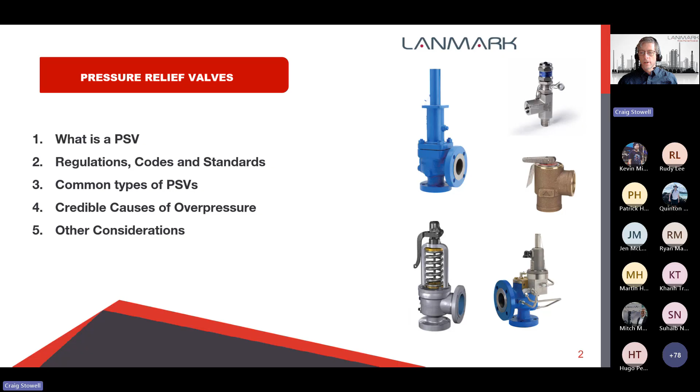So moving right along, what is a pressure safety valve? I'm sure if you're here, you might know already, but essentially it is to protect life and property by venting process fluid from overpressuring a vessel, equipment, or piping system. It's often the last line of protection in a system when all our alarms and shutdowns may have failed. The PSV might be our last line of protection from sometimes blowing stuff up. So they're very important.

So what we're covering today are PSVs that are set at 15 PSI or higher. They open at a set pressure and reclose when the system pressure drops below the set pressure. What we're not covering today are rupture discs, tank relief, safety valves, and vacuum protection.

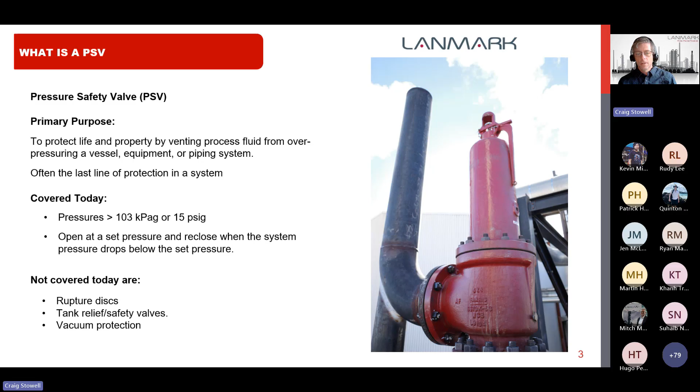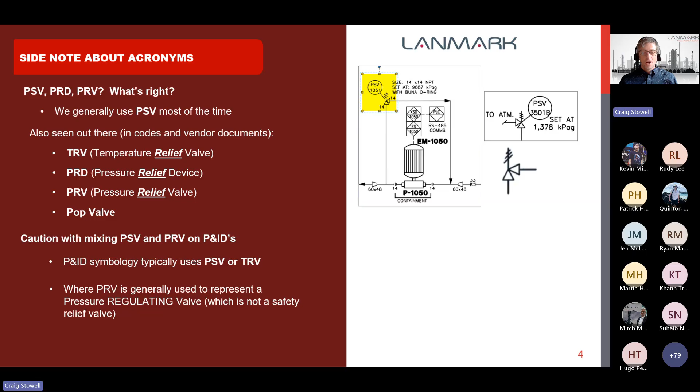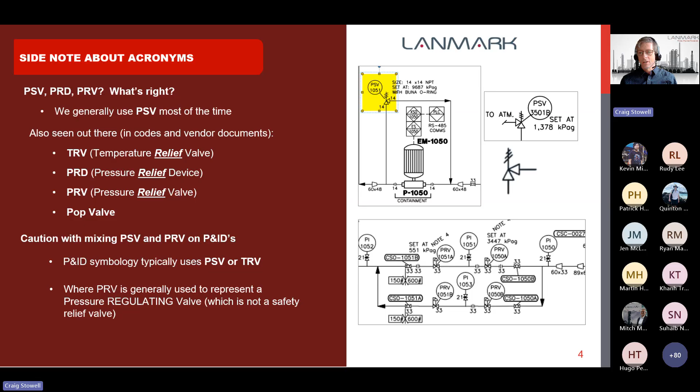I like to talk about a little side note about acronyms, because there's a lot of acronyms for a PSV. You might see PRD, PRV, which one is right? I'd say generally for Lanmark and most of our clients, PSV is used most of the time. But we also see temperature relief valves, TRV, pressure relief device, PRD, and pressure relief valve or pop valves. So caution with PRV and mixing PSV and PRVs on P&IDs. Forgive all the acronyms here, but typically we use PSV or TRV, where a PRV is a pressure regulating valve, which is generally used to drop pressure in a system. You can see the diagram on the right here where we're dropping through regulators. So sometimes you got to keep your acronyms correct. So we are talking about PSVs, and I'll refer to them as such throughout this presentation.

Some of the design standards that are really important when we're considering PSVs are API 520. This has equations and sizing for liquid, vapor, and multi-phase fluids. It also has many considerations for the installation of PSVs, talks about inlet and outlet pressure losses from your PSV. So really important, we go to this a lot.

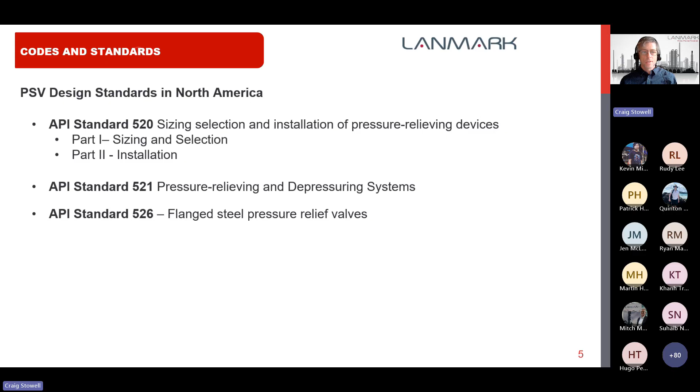API standard 521 aids in the selection and helps guide your decision to discover overpressure scenarios, and helps you not only prompt for all the overpressure scenarios we might encounter, but has equations and guidelines to help determine relieving rates. API 526 is more like the dimensional guidelines for construction of valves, and also defines API orifice areas.

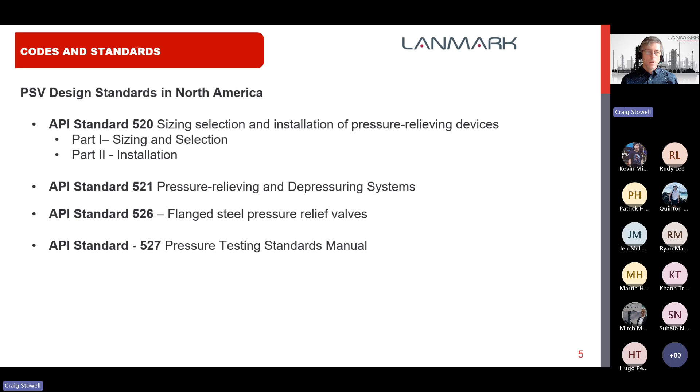527 covers pressure testing standards for all the conventional bellows and pilot operated valves. And if we're dealing with any vessels in the system or boilers, then ASME Section 1 or 8 might come into play.

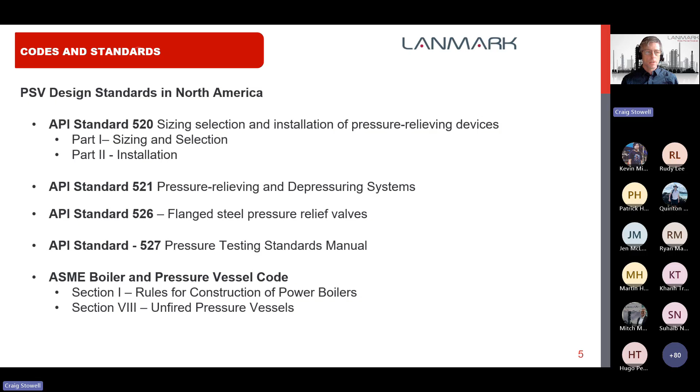We also might have local rules and regulations that we have to consider, both national and provincial. In Alberta, we might deal with CSA, B51 or Z662, AER directives, and ABSA regulations.

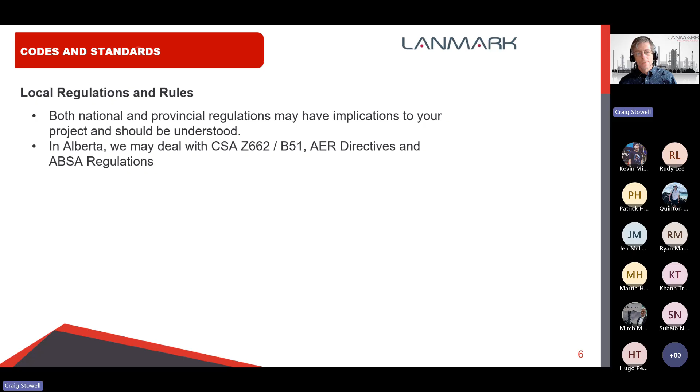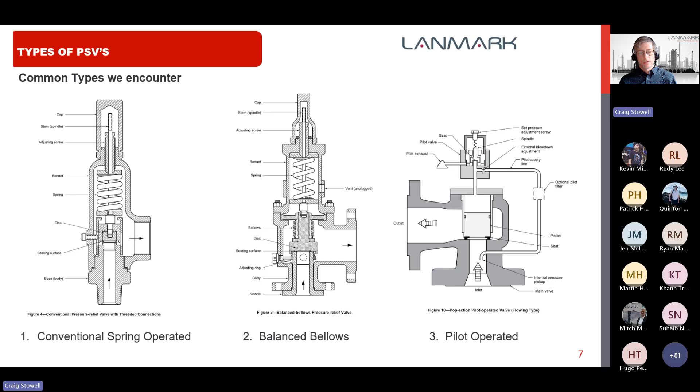So what are the common types we encounter? We encounter conventional spring-operated PSVs, balanced bellows, and pilot-operated. I'll get into the details of each of these as we go. So those are generally the most common that we deal with.

Conventional spring-operated basically have a spring that's set at a set pressure, and when the process pressure exceeds the set pressure, the disc opens and lets fluid out, and it resets once the process pressure drops below the set pressure.

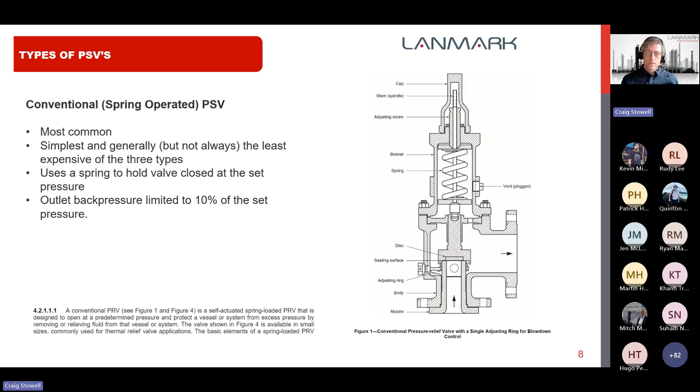One of the limitations of a conventional PSV is on the outlet side, you're limited to 10% of the set pressure. So sometimes that can be a problem in existing systems where you have constraints already, or other things that we'll get into. Balanced bellows are very similar to the spring operated, but it has a bellows to minimize the effect of back pressure.

Generally you can live with about a 30% back pressure on a balanced bellows, sometimes more, depends on the vendor.

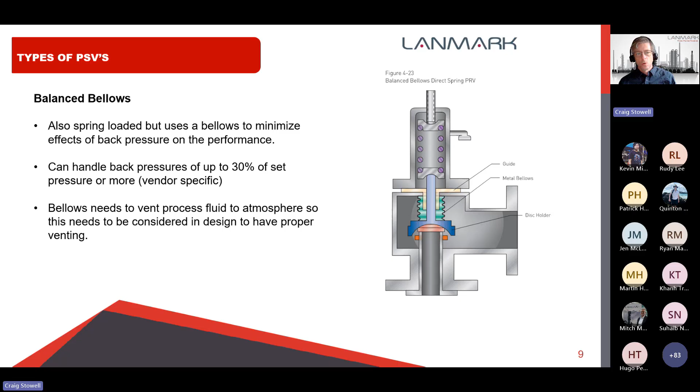And the one thing to note with the bellows is you have to vent process fluid out of the bellows. So if it's toxic, like it's got H2S or something like that, it's something to be considered where that's going to go. If it has to go into a flare system, or maybe it's ammonia that has to be vented outside a building away from people. So it's one of the kind of quirks of the balanced bellows you have to keep in mind.

Pilot operated PSVs don't have a spring, they use a pilot system. Generally, as the operating pressure gets closer to the set pressure, you get a better seal. The balanced bellows and the spring operated have issues when you get too close to the set pressure. And you can also have very high back pressures in a pilot operated PSV, as high as 98% in some manufacturers' PSVs.

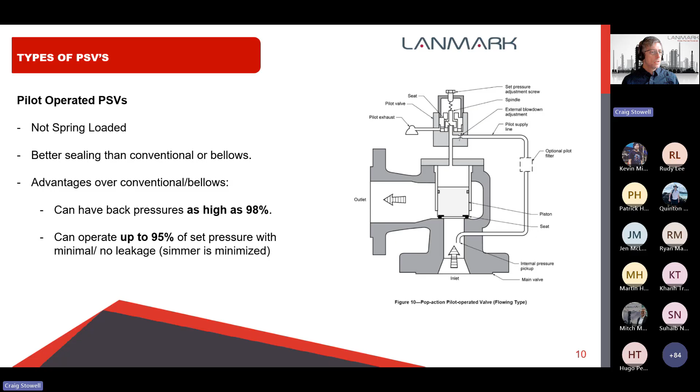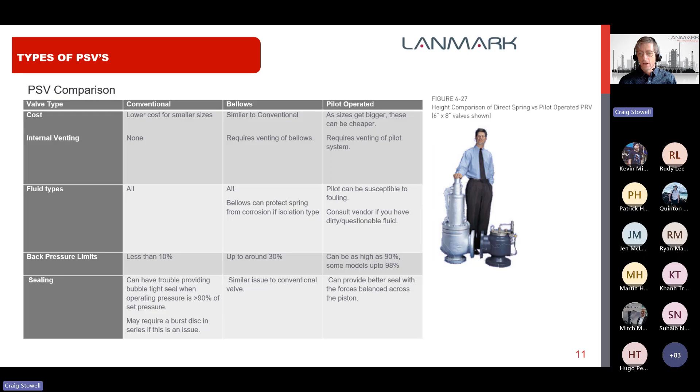The pilot can be susceptible to fouling or freezing, so that's something to consider too. If it's a really dirty fluid, you might have to have filters on your pilot system. So those are the three types of PSVs we generally deal with the most.

Specifying the fluid is important when you're ordering a PSV, because vapor, due to its expansive energy, can generally use a flatter trim, where a liquid trim needs to have some modified geometry to help it open. And generally a liquid trim can be used in vapor, but not vice versa. So keep that in mind. Ideally you get the trim suited for your liquid, but sometimes you're dealing with existing equipment, and sometimes you have previous constraints.

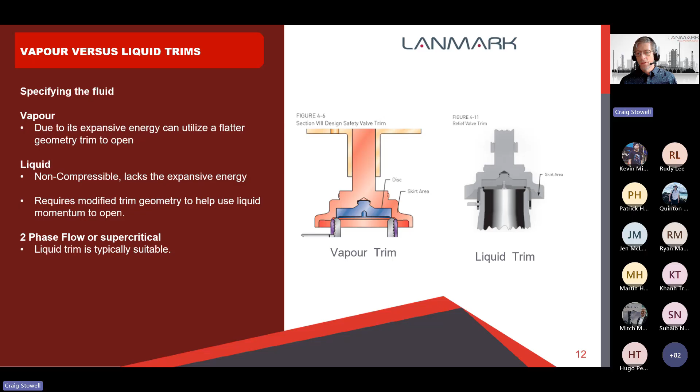Usually it's the liquid trim - liquid trim is usually typical. Sorry, I didn't mention that bullet point there. Does that answer that person's question? Yes. Okay, great.

So this is something to be aware of, and oftentimes pressure shutdowns in plants are set at no more than 85 to 95% of the maximum allowable pressure, to keep our operating pressures so we're not simmering PSVs. It can lead to damage - your PSV could chatter a lot and get damaged. So something to be aware of.

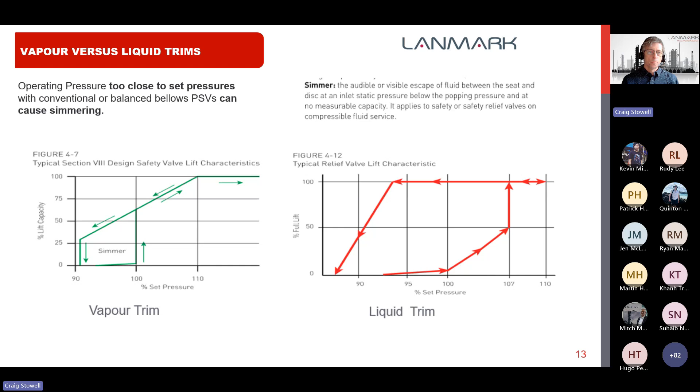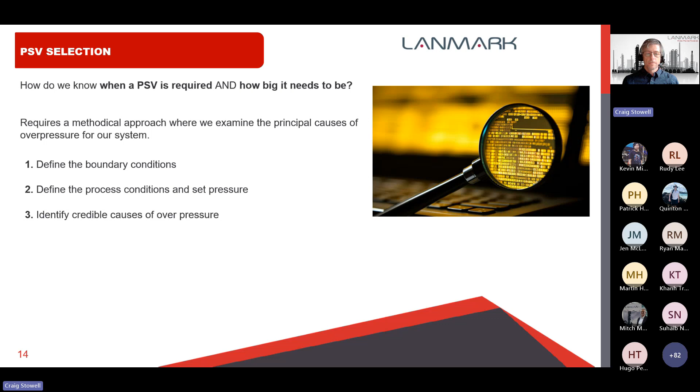So now after we've talked about the types of PSVs, how do we know when a PSV is required and how big it needs to be? Generally this requires a methodical approach where we examine the principal causes of overpressure for our system. That includes defining the boundary conditions, the process conditions, and the set pressure we need, then identifying credible causes of overpressure, determining the relieving rates of each, and then calculating the minimum orifice area required for each credible cause.

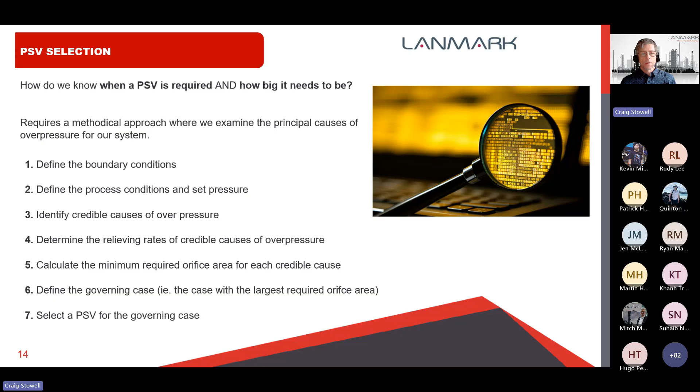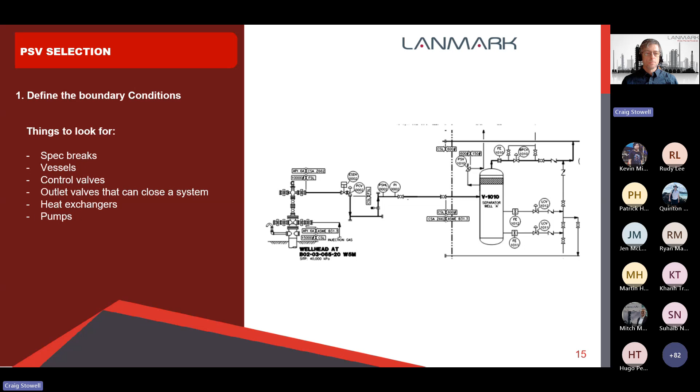And once you've done that, you can figure out what size of PSV you need. Sometimes one PSV covers several causes of overpressure, which we'll get into now. In terms of defining the boundary conditions, on the right we've got a simple, pretty typical wellhead example. Wellhead's operating at 40,000 kPa, and drops from F class down to C class, like 600 ANSI, into a separator. So for defining boundary conditions, the things we should look for are spec breaks, vessels, control valves, outlet valves that can close a system, heat exchangers, pumps.

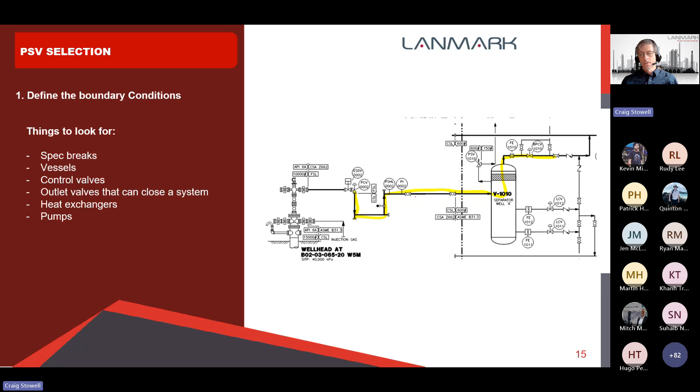Those are all areas where you might need a PSV. So in this wellhead example, we have a spec break at this control valve going from F to C, and then we have a vessel and valves that could close that system. So that's a boundary condition for that system.

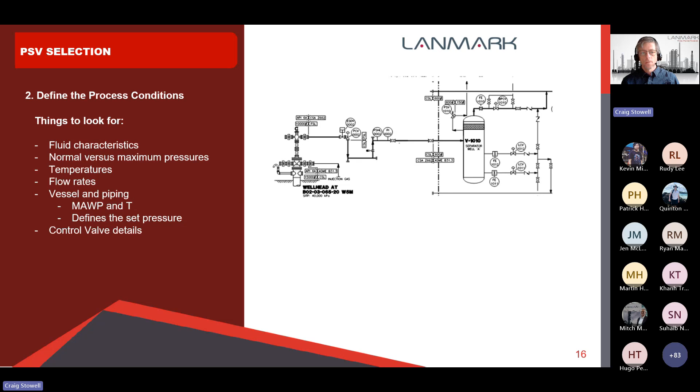Defining the process conditions - we need to know what kind of fluid we're relieving, normal versus maximum pressures, temperatures, flow rates. All of your vessel and piping, like the maximum allowable working pressures and such, will generally define your set pressure. And if any control valves are in the system, control valve details.

So identifying the credible causes of overpressure - this is where I had mentioned previously API 521, section 4.4. It lists about 16 causes. I don't expect you guys to read this whole table from API, but it lists a whole bunch of different causes of overpressure that we should be considering. The ones we generally see the most are closed outlets, failure of automatic controls, control valves failing to control, internal explosions maybe not as much, but transient pressure surges like water hammer, hydraulic expansion - we'll get into each of these - and fire. Those are some of the most common ones we see and deal with.

But as you can see, in our typical oil and gas petrochemical industry, there's a lot of different ways we can see overpressure scenarios.

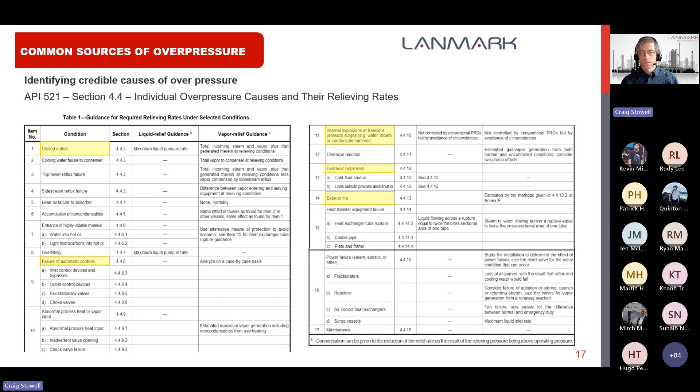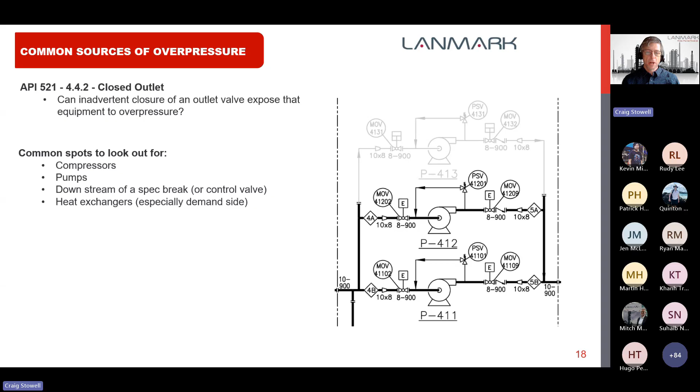So what can an inadvertent closure of an outlet valve expose that equipment to overpressure? On the right, you can see a pump, a couple pumps in parallel, and there's outlet valves, MOVs, that could potentially close. Maybe there's a manual valve that could be inadvertently closed. So pumps, compressors are all good places to look at that - any downstream spec breaks across the control valve, or heat exchangers, especially on the demand side.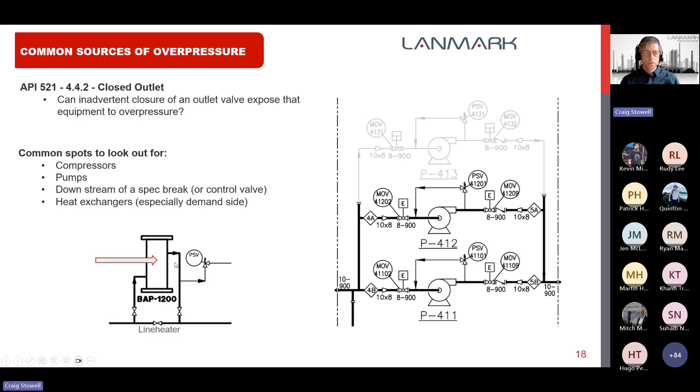So in this diagram here, if we had a line heater, say we're heating up oil going through this line heater, we're adding heat, and someone accidentally closed this valve, we could easily overpressure by heating up that fluid. So that's another scenario of closed outlet that could cause overpressure.

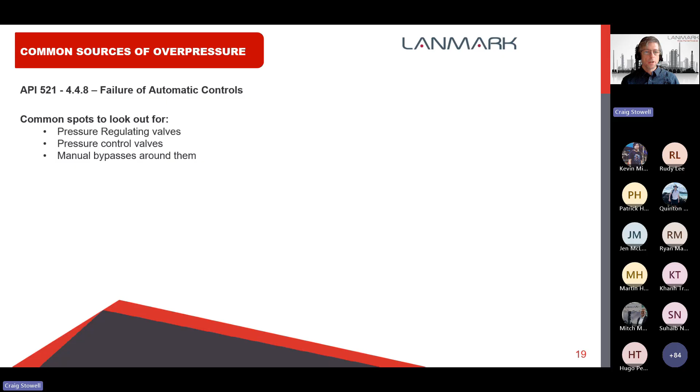Failure of automatic controls was the next one, and common spots we want to look out for here are pressure regulating valves, PRVs, pressure control valves, and while not exactly a failure of an automatic control, manual bypasses around regulators or control valves can sometimes flow more than the control valve itself. So those are something to be really aware of if someone cracked a bypass around a control valve - they can often flow a lot more than the control valve.

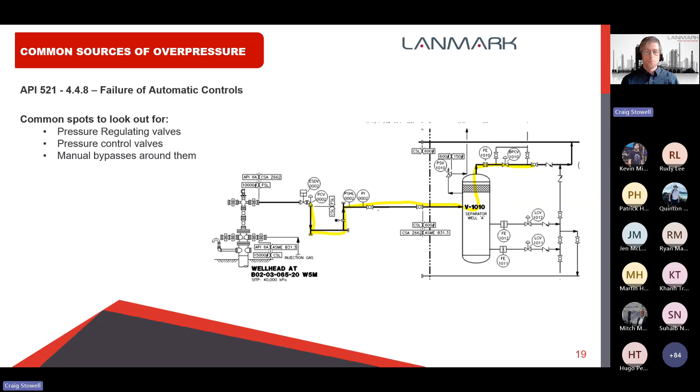Pressure transients, water hammer - this is kind of like a train hitting a wall. Closing valves at the end of liquid pipelines can cause transients. It's a momentum thing, so the more mass and the higher velocity you have in the pipe system, the more you can raise that system pressure.

You can easily double, triple, or even more times the MOP of a pipeline if you're not aware of water hammer. And the interesting thing with water hammer is it typically cannot be mitigated by a conventional or pilot operated PSV, because they just can't react fast enough.

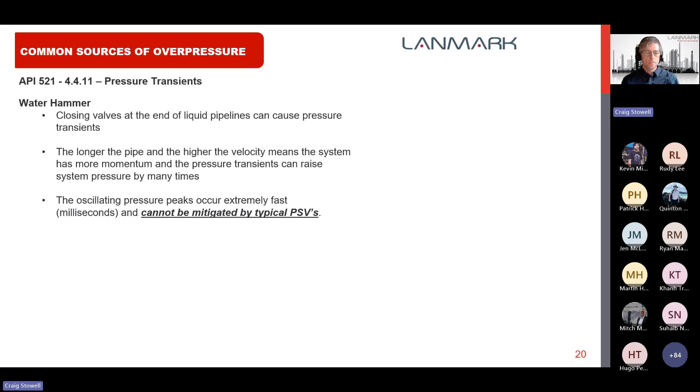So a couple ways we can mitigate for water hammer. The easiest, probably most common way is just to control valve closing time. If you're at the end of a big pipeline and there's ESDs, we just slow the closing time so that those pressure transients stay within the pressure rating of the pipeline.

When you can't do that - or this water hammer could also happen at the suction end of a pump if the pump just shut down hard and the flow into it stopped. So that's another way water hammer could happen.

Sometimes you can't control water hammer with valve closing time, so you can get into surge relief valve systems. The one on the right here is a Danflow surge relief valve system, which has super fast reacting control valves and dampening vessels, surge vessels that help you control water hammer. So yeah, those can get interesting.

Thermal expansion - we talked about that in the case of the line heater where we're heating up locked in liquid. Anytime we have liquid blocked in outside or inside, you don't need a lot of heat to create really big pressure changes in pipe. For example, if we took water at 1,000 kPa and 5 degrees and heated it up to 10.7 degrees Celsius or so, you'll hit 9930. So a 6-degree temperature difference can really drastically increase pressure in a blocked in fluid.

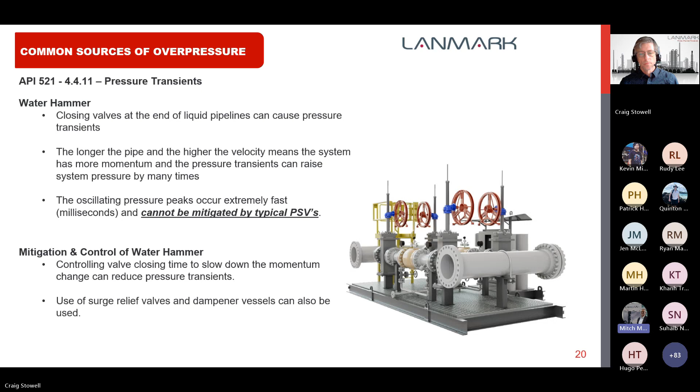Okay, we can maybe talk about it later, after. Sure.

Yeah, so Southern Lights diluent, getting back to hydraulic expansion - this diluent is a little more squishy, I guess you'd call it, than water, and takes a little more temperature to get you up to 9930.

And then something like ethylene - this is ethylene in a supercritical phase - it's even more squishy, but still, all of these temperature differentials could easily be seen if you closed a system in the morning and it heated up on a summer day. These kinds of temperature differentials are not unheard of.

So TRVs are typically used to basically burp fluid out as the fluid expands.

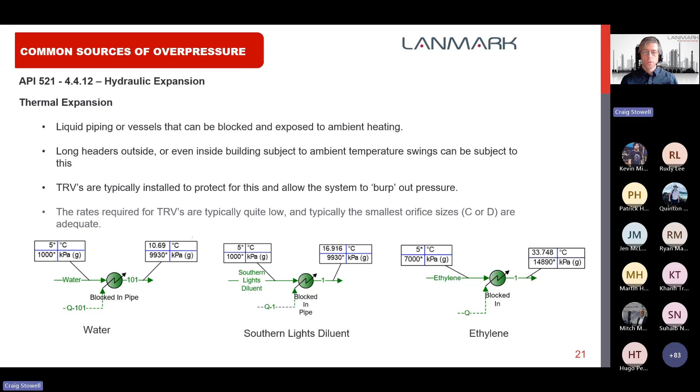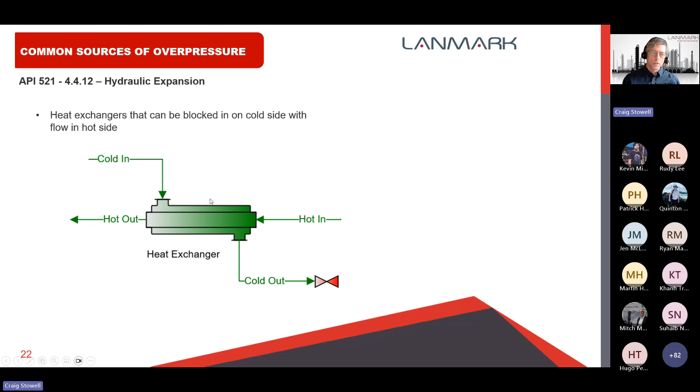Hydraulic expansion, yeah, another way this can happen is if you're heating up, say, some kind of fluid - we've got our heat medium going through this heat exchanger and we're trying to heat something up, and we close this, that could easily be a cause of overpressure. So heat exchangers, keep an eye out for.

Fires - typically we size for pool fires. This comes from a pool of flammable liquid accumulated under vessels. Piping is usually not considered a credible source of overpressure in a fire - that's according to API 521.

Basically the bigger the vessel, because the equations are based on the surface area of the wetted area - so if your vessel's half full, that bottom area matters - the bigger the vessel, the bigger the PSV will be.

Although there are equations for vapor-filled vessels to size a PSV, if you're heating that vessel enough to cause the vapor to expand, you're generally at a temperature where the vessel has become so weak - it's this sort of awkward thing. You're putting a PSV on the vessel, but the vessel might fail because the temperature has gotten so high by that time. So sometimes it's hard to put a vessel in without a PSV due to the ASME codes. Anyway, there are equations for that.

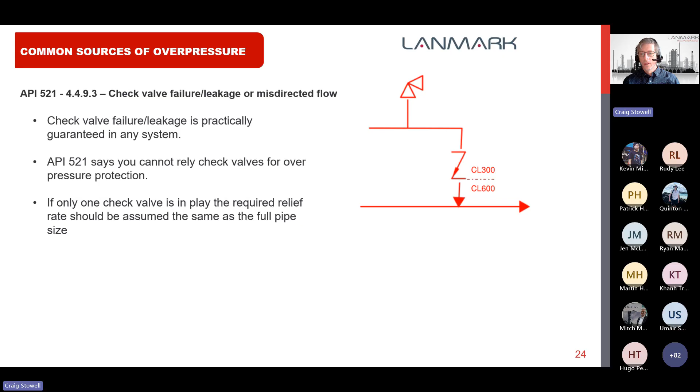Another common thing we see awkwardly is check valves defining a spec break, like this system here where we've got a 600 ANSI line going this way and we're trying to tie a 300 ANSI system in. Check valve failure is practically guaranteed. You can't rely on them for overpressure protection. So if you only have one PSV or check valve in play here, that PSV is going to have to be pretty big.

Another question here. When piping is not covered as an overpressure protection case according to API, what happens, suppose, across country pipelines for LPG or a high boiling point liquid, and there is fire? Like if the line was above ground or something like that. Because usually a line would be buried if it was a long pipeline.

But I can answer the question. We had a system where we had a butane line. I'll just go back to the fire slide. We had butane bullets that were feeding another plant, maybe 500 meters away, and it was an above ground 4-inch line across this field. And the question was raised in a hazard analysis: what if there was a grass fire? Would we want a PSV on that?

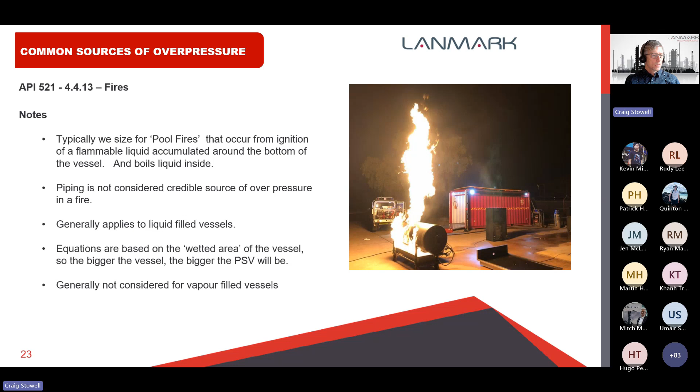So we did do a calculation for that. Yeah, I guess with anything, it depends. Like if you want to include piping, there's nothing saying you can't, but API does say it's not typically a credible source of overpressure, because your surface areas could be quite small. Hopefully that answered that question. Yeah, I think we're good.

Okay, thanks. So back to check valves or misdirected flow. One of the strategies API offers in a scenario is to use double check valves of different types. You could basically assume that instead of the full flow coming back and hitting that PSV, only one valve fails and the other leaks by 10% or so. So the PSV size you would need, you wouldn't eliminate the need for that PSV necessarily with two check valves, but it could be a lot smaller. If you wanted to eliminate the need of that PSV, another layer of protection would be needed there.

So now that we've gone over some of the more common credible scenarios for overpressure, we'll go back to this wellhead example, and quickly go through some of the credible scenarios of overpressure. Say if this valve closed and we still had all the flow coming in, we have potential for blocked outlet being a credible case of overpressure. If this pressure control valve failed to control pressure, or the choke valve washed out, which is pretty common...

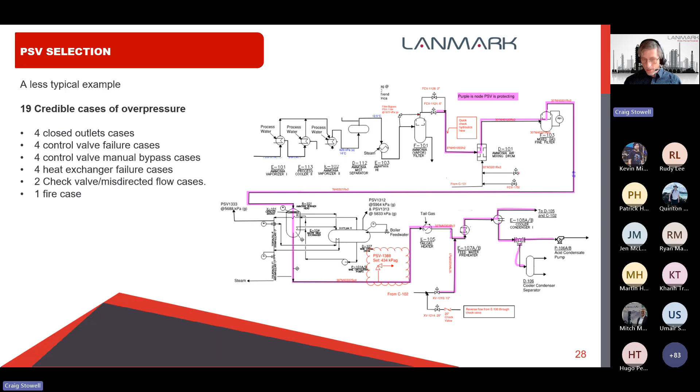And that one, this API checklist came in really handy because there's just so much to keep track of, and some of the cases were vapor relief and some were liquid relief, and yeah, it was a really interesting project.

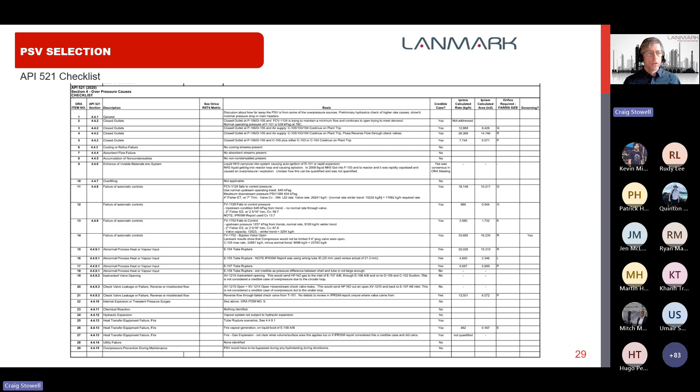Yeah, and then the other considerations once you've figured out what size your PSV is going to be is ensuring that your inlet losses, so wherever, typically, like here's a filter where we've tied in to protect this filter, the inlet loss, the pressure loss when that PSV is going from the vessel to the PSV, has to be less than 3% of the set pressure.

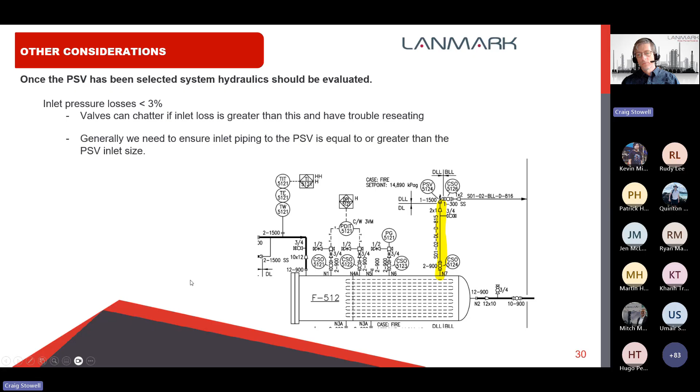So yeah, and generally you want to keep your inlet piping bigger, or as big as, or in this case we had a 2-inch going into a 1-inch PSV. But those hydraulics are important to check. Having too high inlet pressure can cause chattering and such, and premature wear to your PSV.

And then on the outlet side of the PSV, we want to do hydraulics and ensure that for conventional PSVs, you're less than 10% of the set pressure at the back pressure when that PSV opens. And yeah, sometimes that's, PSVs going to atmosphere, it's easy, and sometimes you have a big flare system and it gets a little more interesting.

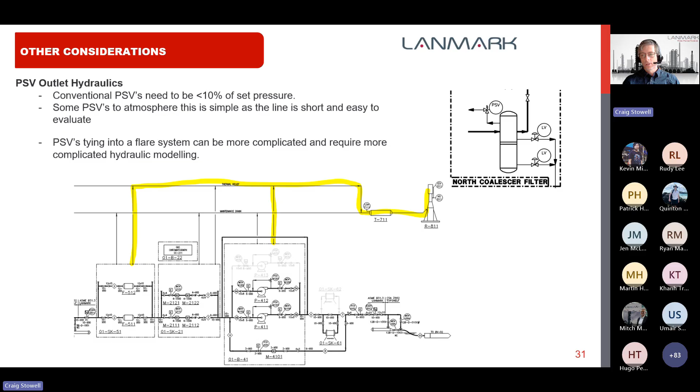Yeah, and that kind of brings us to the end, and can open it up for questions if there is any more.

Sure, I have a couple in the chat, Craig. Just open that up here. I don't know if you, would like to answer probably, oh, it was previous person.

Is there any specific clause in API 521 for surge pressure that we can take credit for the fast closure of check valve to alleviate the maximum surge pressure, or we can't?

Fast closure of the check valve for water hammer. Not sure I understand the question.

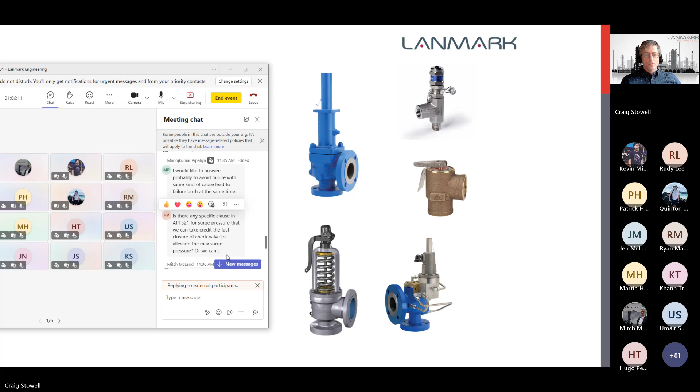Hey Blake, what are the most common mistakes you see?

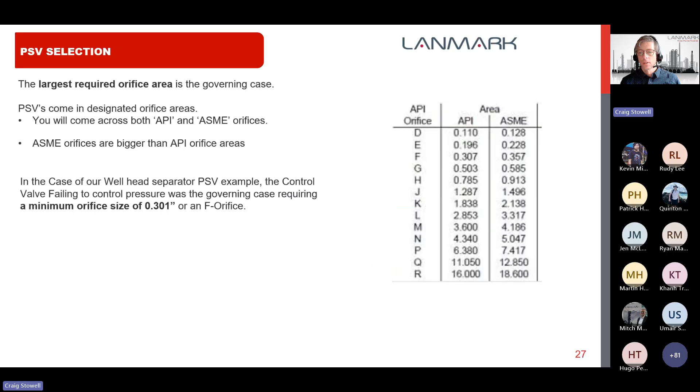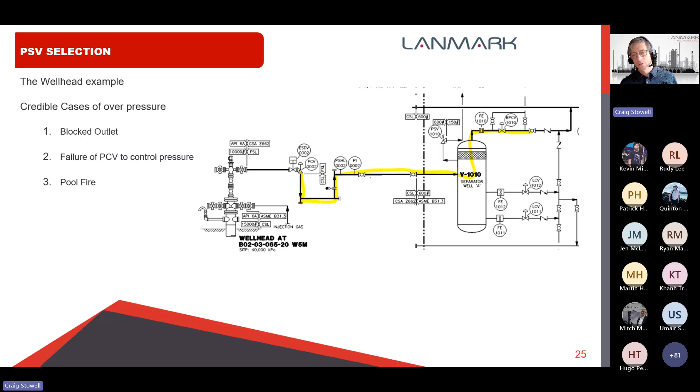That's a good question. I'd say it's not even about less experience, we can all make them. I think the biggest mistake is assuming - I'll go back to the wellhead example, I like to have pictures, just a diagram. Often, like in this example, people just assume they know what the credible case is already - like, oh, it's a wellhead separator, it seemed to be block flow is always the scenario we sized the PSV on, or was the basis. So I think when you think it's obvious, that's probably when you want to pay the most attention and ask, am I really thinking of everything? Because if you think it's blocked outlet, oh, it's fine, it's blocked outlet - maybe you're missing stuff.

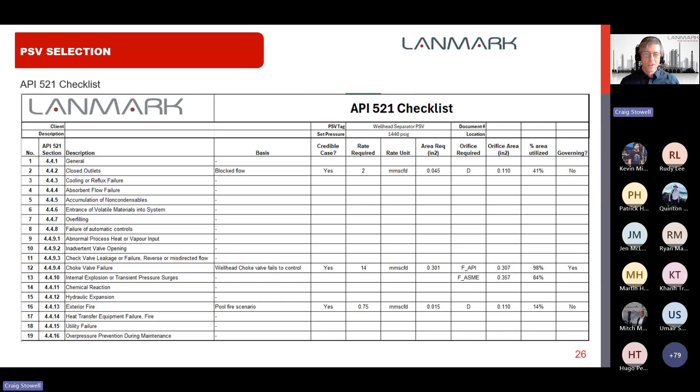That's kind of why we developed that API checklist, just so we keep ourselves honest and go through it, like yes, yes, or no, no, no. We found that a really valuable tool - if someone's checking your work, they can come back and say, did you consider failure of automatic controls, for instance? And if they've checked that off the list as not credible, then that's fine. So I'd say the list has been pretty valuable for us in not overlooking things. Just be careful when you think it's obvious.

A question from Janine: what is the difference between ASME and the API orifices? Is it mainly sizing or other design differences?

Well, their areas are different, essentially. So the ASME - let's go back to that chart - sorry, just finding my way here. Yeah, so this is the area of those orifices, so the ASME orifices are bigger areas, so they can essentially let out more flow. That's the main difference.

Have another question from Theo: any thoughts on how best to manage or address PSV discharge lines with low points? Best to avoid, but not always possible to avoid?

Best to be avoided - you want to go up so that no liquid can accumulate upstream of your PSV, but I know it's not always possible. So yes, low point piping due to design restrictions - it's awkward for sure, especially if it's a gas line that could have liquid down there.

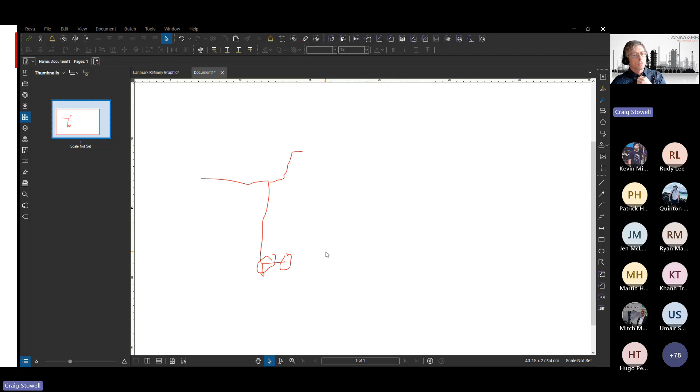Quinton, he's one of our process engineers here at Lanmark - to the question of this low point drain, if that could fill up with liquid and there's no avoiding that, you'd want to consider that in your outlet pressure loss calculations.

Any other questions?